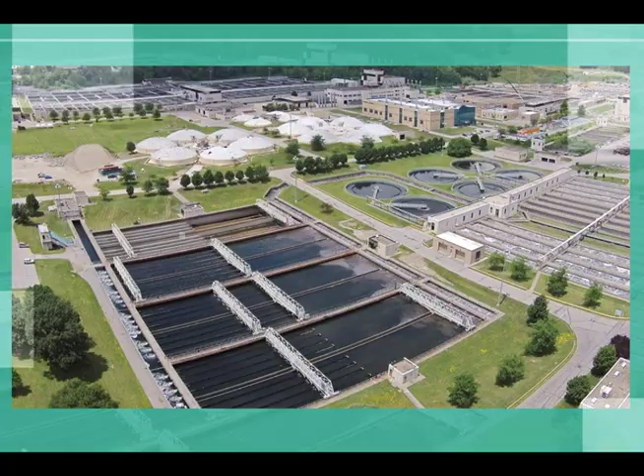Hi, and welcome to this edition of Clean Water Works. I'm Jen Elting. And I'm Raymond Wheaton. Today we're at the Southerly Wastewater Treatment Plant, the largest of the district's 3 plants and the largest in the state of Ohio. In today's show, we'll learn about Geographic Information Systems, otherwise known as GIS, and we'll take a look at a green infrastructure project that is beautifying a once polluted neighborhood. But first, Frank Greenland is going to talk to us about wastewater treatment in another episode of Sewer U.

Hello everyone and welcome to Sewer U, Sewer University. We're going to talk today about the history of sewers and clean water in Northeast Ohio, specifically the greater Cleveland area. I am Frank Greenland. I'm the Director of Watershed Programs.

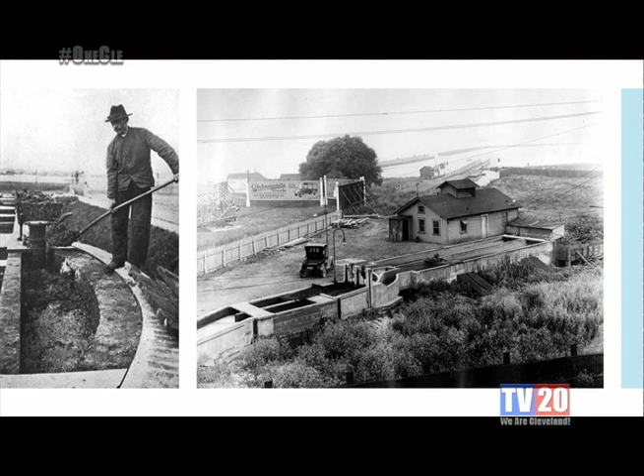And again, the treatment plants were constructed in the 20s and 30s across Northeast Ohio. And in those days, the regulations were nowhere near as stringent as they are today. And these systems have evolved, and we're in another phase of advancement at these treatment plants to make them a little more sophisticated. But the process is very simple, actually. When you bring sewage into a treatment plant, remember, we're bringing them in big-time interceptors, very large tunnels, very large pipes, some of them in excess of 10 feet on the sewer side, and the tunnels are 24 feet in diameter in some locations.

There's a lot of junk that can get into a sewer system, so preliminary treatment is the process at the front end of the plant to make sure the heavy-duty stuff, and I'm talking rocks and trees and litter, that large-scale litter, believe it or not, can get into the system. It can wash off the street and get in. Sometimes people dump things into sewers, mattresses, whatever. So we've got to make sure that that heavy-duty material does not get through the treatment plant. That's what preliminary treatment is, and we'll show you a graphic.

Primary treatment is the next step. And essentially, primary treatment is swimming pools that slow the water down and allow the solids that are in the flow stream to settle. Those that will settle pretty quickly settle out in primary treatment. Secondary treatment is a process where we use bugs, microorganisms. And microorganisms like to chew on organic pollutants, and they do that for food. So their job is to remove the gross contamination by feeding on organic pollution, and they too settle out in swimming pools.

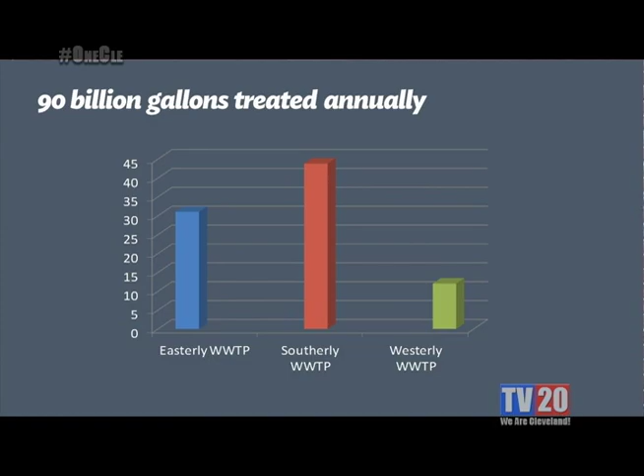Again, these plants treat a lot. Most of this flow is wet weather flow. You get a lot of spikes of wet weather, but southerly is up towards 40 to 45 billion gallons a year. That's a lot of flow that gets treated in these treatment plants. But these treatment plants are award-winning treatment plants, rarely is there a permit violation. Sometimes for years, nothing. And we are regulated with a number of chemical constituents that we have to meet. So these plants are extremely good at doing what they do. These are the processes at a treatment plant.

I'll show you slides on each. Preliminary treatment, primary, secondary, disinfection. I also threw in solids handling, and that's a big, expensive process. When any of these steps generate solids, they drop to the bottom, or the heavy stuff gets scraped off a screen. So you have to process not just liquid, you have to process solids. And we'll show how that happens.

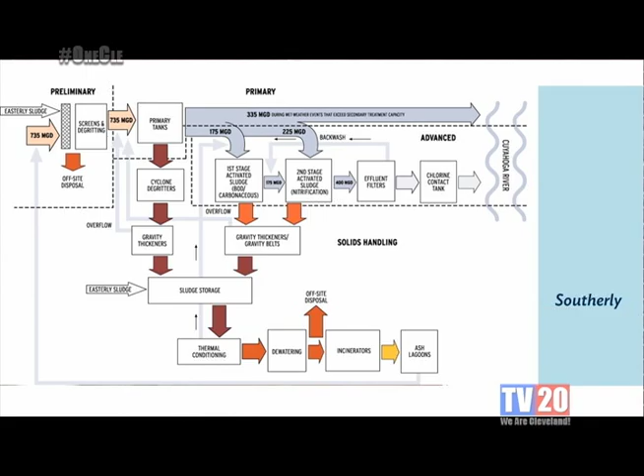All the orange and red is the solids flow stream. In each tank, stuff settles to the bottom, and you have to remove those solids and eventually deal with them. Truck them off to a landfill, incinerate like we do. So the solids flow stream is a very complicated process at a treatment plant, but it's just as important as the wet stream.

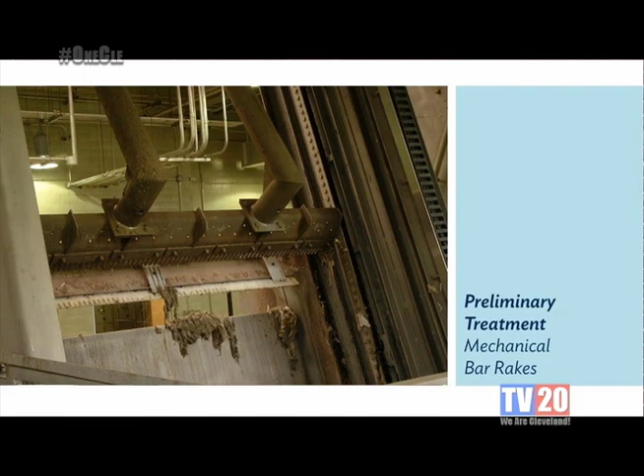This is preliminary treatment. This is a bar rack. This is a scraping mechanism. Wastewater is flowing through a bar rack. I don't know what the spacing is today, let's say it's 1 inch apart. There's vertical bars, and if there's a tree coming down the pike, they get it here. Because anything big that could get past this point will plug pumps, mess with equipment, damage equipment. So we've got to take care of it right in the front end.

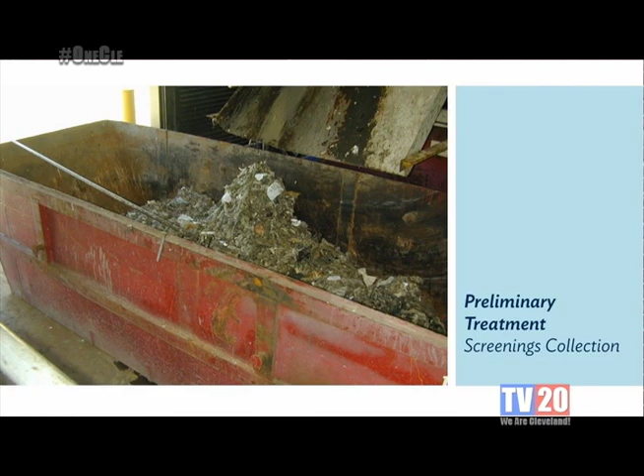So the rags and junk we collect at the head of the plant are removed in preliminary treatment. These are mechanically cleaned. Back in the day, they were cleaned by individuals with rakes. And this stuff smells. I mean, this is bad stuff. So not a fun job, but we mechanically clean, the screenings go into hoppers, and they're disposed of at a landfill.

The other part in preliminary treatment is what we call grit. So grit, in its simplest form, is coffee grinds. Coffee grinds are pretty gritty, right? And they sail through the wet stream and settle out. Street runoff, all the little rocks and pebbles, or eggshells, anything that can be sharp and abrasive, we need to get rid of in preliminary treatment through what we call aerated grit channels, and allow that grit to settle out.

If we don't, because they're so gritty, they'll erode pipes, tear up pumps, degrade metal, and over time your pipes will burst or your pumps will wear away. So we don't want that. So we use what's called aerated grit. This is an aerated grit channel where we put some air in and allow the flow stream to tumble. We allow the grit to settle and we remove it.

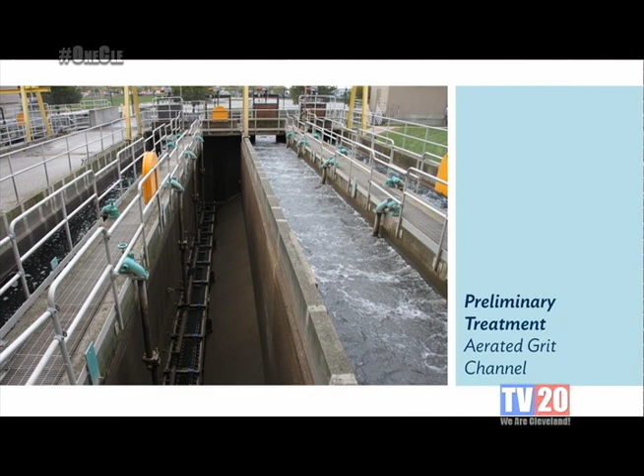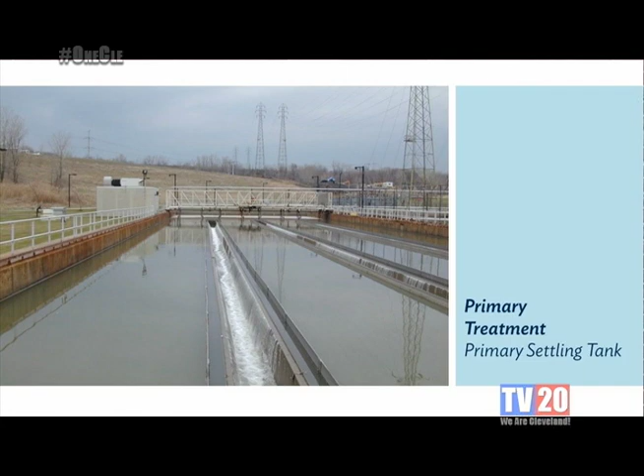This is primary treatment. At wastewater treatment plants, the tank configurations are all different. These are large rectangular tanks, and we're slowing the flow down. This is sewage coming from your home, or stormwater in a combined sewer area. We allow the solids that will readily settle to go to the bottom. We need hours and hours of detention time to make sure the velocity is very slow. Solids go to the bottom, and the cleaner water pours over the top weirs.

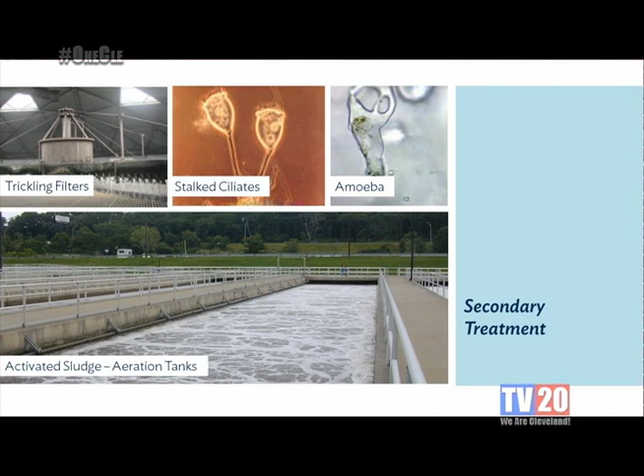Secondary treatment is a couple-step process, and microorganisms are used to chew on organic compounds and other pollutants. They like the polluted wastewater as food. They eat that food, which reduces pollutant levels. They reproduce, which creates more bugs. Some of the bugs die and have to settle. So it's a balancing act of bugs and wastewater, so that you reduce the pollutant levels but don't create too many solids.

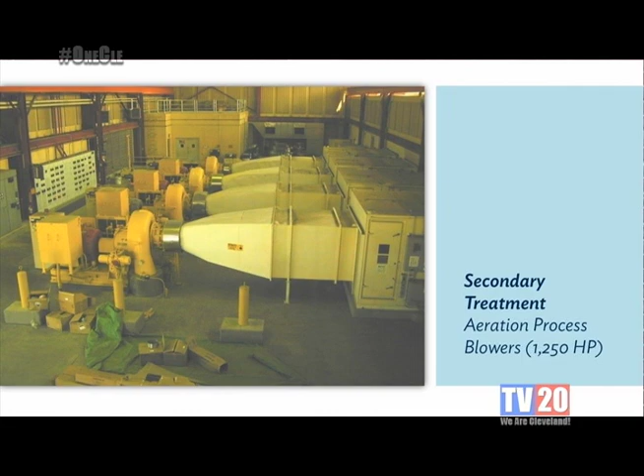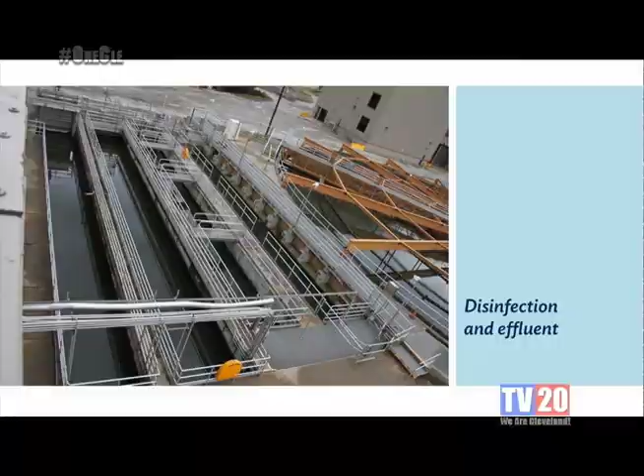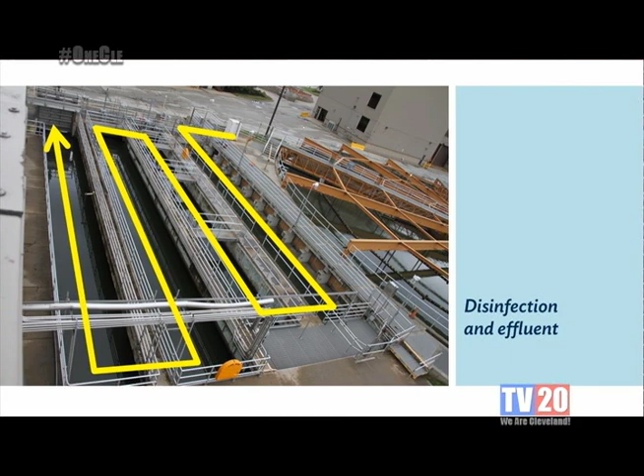So that's secondary treatment. At the very end of the process, in the recreation season, we need to disinfect. These tanks are disinfection tanks. Chlorine's applied at the front where the water's coming in, and it's bleach, sodium hypochlorite. And the bleach, with mixing and time, kills off microorganisms.

E. coli is the indicator organism. And we have a level of E. coli that we've got to be under to protect recreation uses of the water body. And so it's a combination of bleach, and then at the tail end, another chemical is used to make sure that any excess chlorine that still exists, because chlorine is a very toxic compound to aquatic organisms, is removed. And we do a great job at this as well.

Each plant has it. The grit, floatables, sludge, what do you do with them? Do you have contractors come in? Okay, good question. What is done with the extra? Grit and floatable materials, the skimmings and grit at the head end are trucked away, and they go to an approved landfill. The other solids, the stuff that sits at the bottom of the primary tank and the bottom of the secondary tank, and you'll see a slide, we incinerate, we collect.

We have a process to continually get rid of as much water in those solids, because water is expensive. If you're going to truck it, you're going to pay for a lot of water. You want to pay for a lot of solids. So we got to get rid of the water. Now we use incineration, so you don't want to insert solids in an incinerator that's wet. So we have a process of getting the water out of those solids, and then we feed the solids to the incinerators where we burn them up, basically.

Now there's ash that's created. That has to be removed and go somewhere. And for a while we've been storing with some available land at Southerly, and eventually I think we're going to have to truck that off as well. But you've taken a massive volume of solids and through incineration, made it a very small quantity. Now incineration has some air pollution implications, and our new incinerator has got state-of-the-art scrubbers and what have you, to make sure we're not creating an air pollution problem as well.

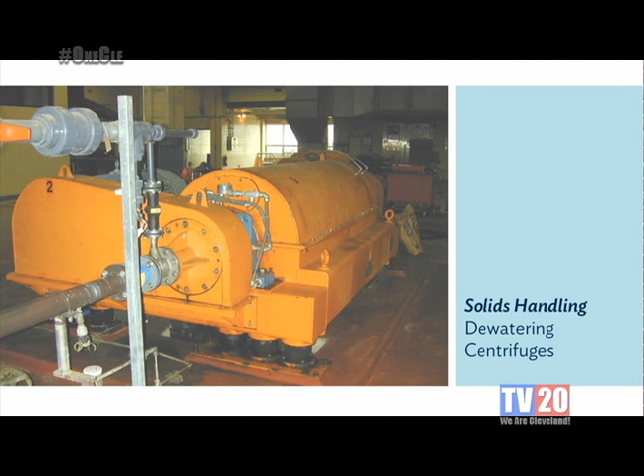So we talked about solids handling. So these are things that are drawing solids off the bottom of these tanks. We've got to get the water out. We use incineration. So once we get enough water out of the solids, they're constantly fed or intermittently fed to our multiple hearth incinerators. And these are very high temperature, and they use those solids as fuel. And if you can get the right balance, what they call autogenous, they'll self-burn. And you can shut the gas off and they keep burning.

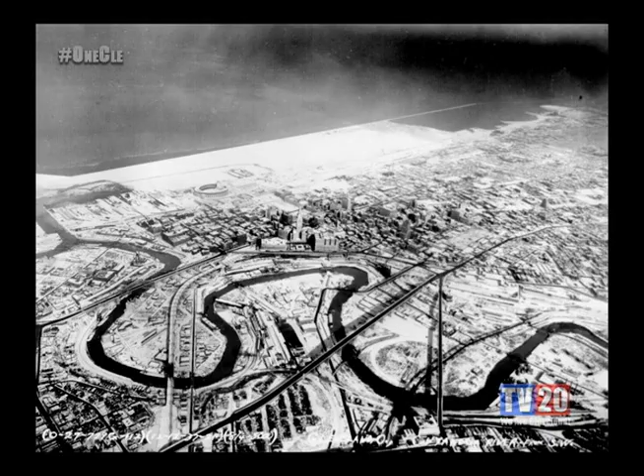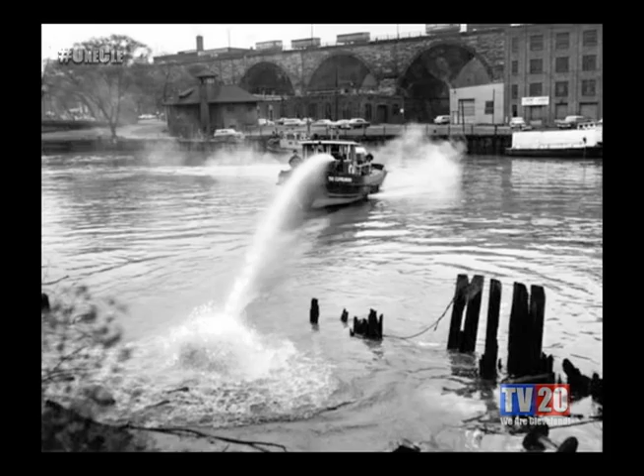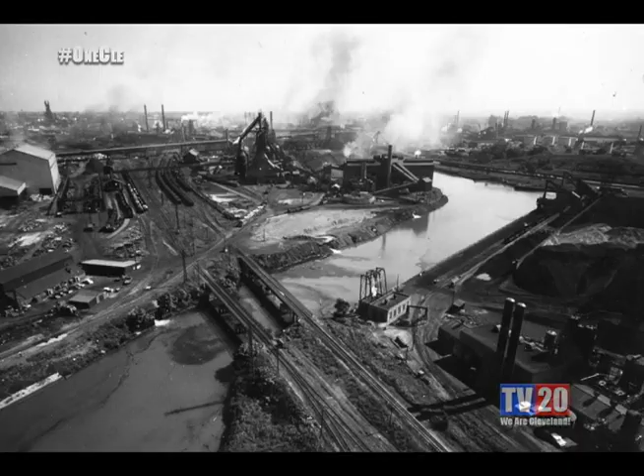2019 will mark 50 years of progress since the most famous of fires on the Cuyahoga River. On June 22, 1969, a spark set ablaze a blackened coat of oily pollution floating on the Cuyahoga. It was not the first fire. The Cuyahoga had blazed more than a dozen times prior, but this time the response was different, and it changed the country's future. In the late 1960s, Cleveland's industrial prosperity had resulted in environmental neglect. Not enough was done to adequately treat wastewater in our booming industrial city, and there were no industrial discharge regulations.

The 1969 fire thrust Cleveland into the national spotlight. Cleveland Mayor Carl Stokes, a longtime advocate for environmental responsibility, criticized the federal government and vowed to fight for a cleaner river. Time magazine detailed Stokes' fury in an article about the river's burning. In 1970, a groundbreaking piece of environmental legislation, the National Environmental Policy Act, helped to establish the Environmental Protection Agency. In 1972, Congress passed the Federal Water Pollution Control Amendments, which would become the Clean Water Act of 1977.

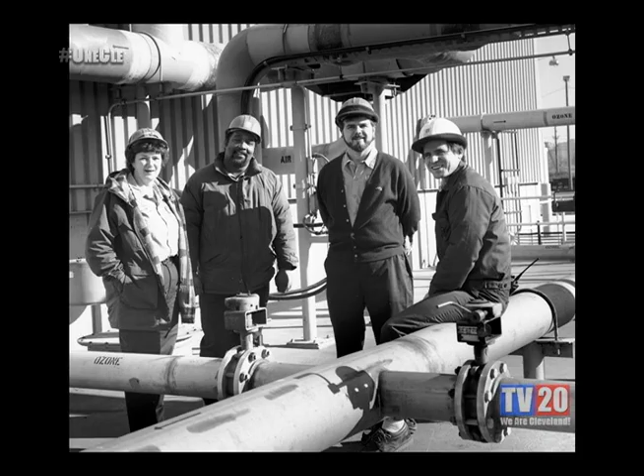It was in this national context that the Northeast Ohio Regional Sewer District was created. The district took responsibility for the wastewater treatment needs of Greater Cleveland, including clamping down on industrial discharges into the lake and river. Once declared dead by national media, the Cuyahoga River now boasts more than 60 different species of fish and has been found to be a home of freshwater mussels.

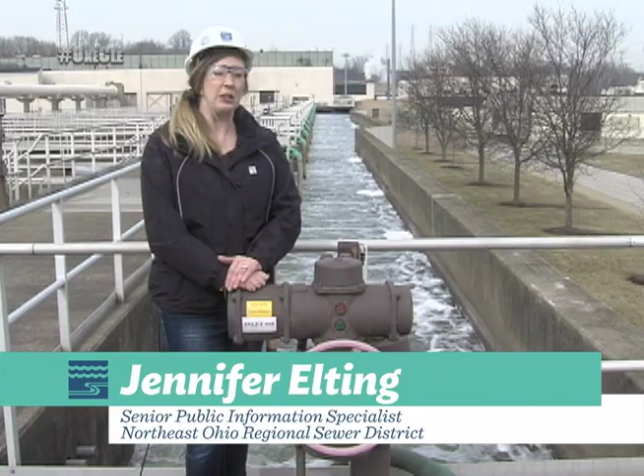And now we're going to visit one of our sewer district construction sites and learn how we are transforming a polluted former scrapyard into a park space. My name is Brian Doherty. I'm a construction supervisor here at the district. We are currently at Woodland Central, located around Kinsman and Grand in Cleveland.

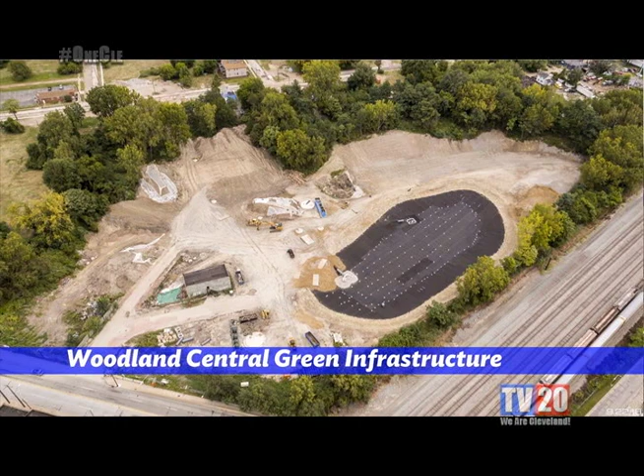We bought 6 acres here. The Kingsbury Run used to run through this site. Used to be an industrial fill and then turned into a junkyard. During the basin excavation, we found approximately 100 tons of solid waste, between 7,000 and 9,000 tires. Essentially, anytime we dug in this project, we found a tire.

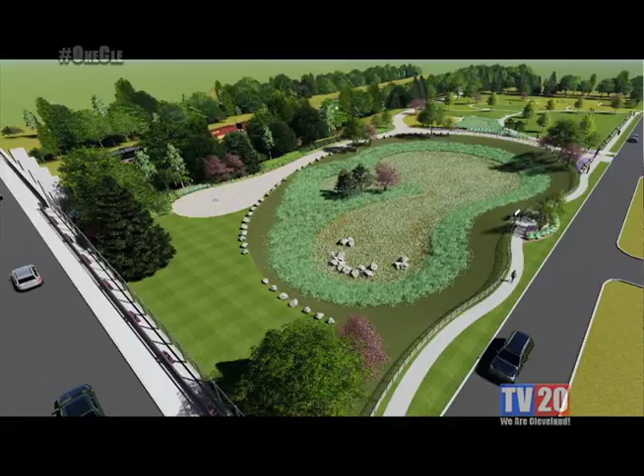Now we're going to turn this into a green infrastructure project, which will collect the stormwater from up in the neighborhood in Kinsman and off of Woodland, and will come down here and then go into our stormwater system, which will be discharged into the river.

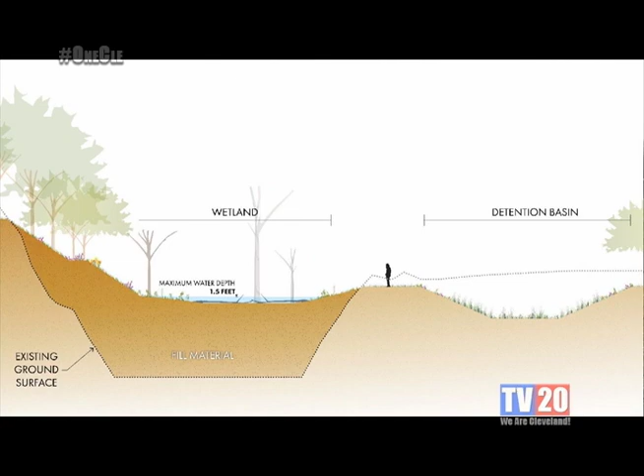Around end of March, we'll begin planting trees and landscaping. It's going to be a lot more stuff going on here. It's pretty barren right now, but it's going to look real nice. We'll have walking trails, paths, landscaping.

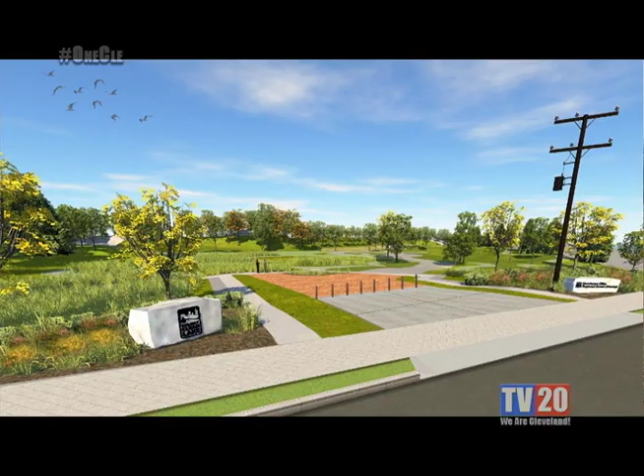The benefit of this project is we're going to offload stormwater before it enters into our collection system. So as part of that consent decree, we're required through all our green infrastructure projects to reduce that by 44 million gallons. It's going to be really nice when we're all wrapped up.

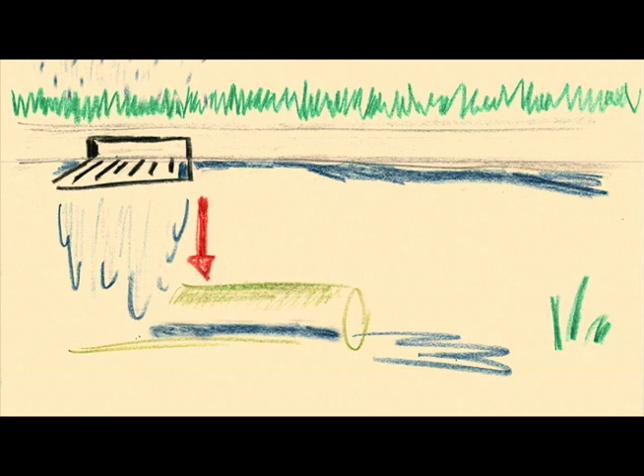I love my dog, and she loves to play outside. When we're in the yard or taking walks, she poops. No, not in the toilet. On the grass. That's what dogs do. But we remember to pick it up so the yucky germs stay out of the water. When it rains, water flows right back to our rivers and streams. Picking up after your pet helps keep our water clean.